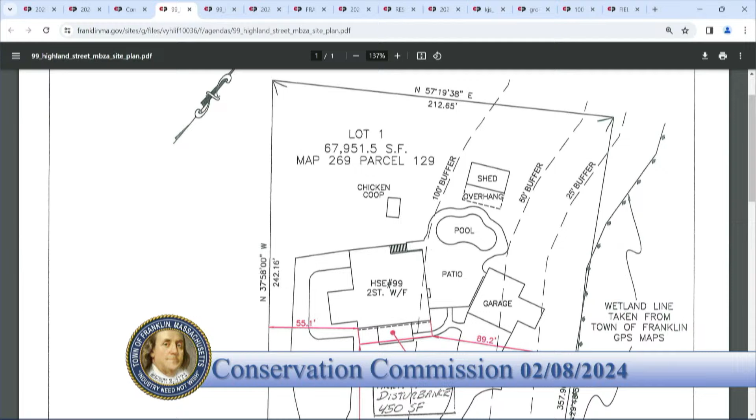Good evening, my name is Bill Yadacernia. I'm an engineer, and the applicant's son, Darren Lang, is here. The applicant is Michael Lang at 99 Highland Street, and it's proposed as a minor buffer zone activity. It's construction of approximately a 10-foot wide by 44-foot long awning over the front of the house.

The awning is made out of wood with an asphalt roof, and the base would be patio blocks on the ground underneath it. For the foundation, I think in your documents we recommended a 4-foot deep sonotube, which is concrete and has to be excavated. We've also been looking into an auger instead. These augers cause much less ground disturbance — you screw them into the ground, so you don't have to worry about excavation and all that soil being disrupted.

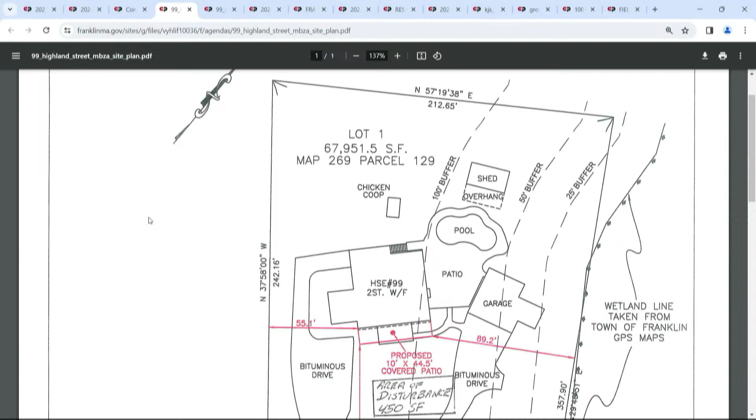The minor buffer zone activity is about 89 feet from the edge of the bordering vegetated wetlands. The ground disturbance is about 450 square feet, of which about 90 square feet is actually in the buffer zone — the rest is outside the buffer zone, as you can see on the sketch. I think that's pretty much it. We believe everything complies with the criteria of the minor buffer zone activity. It's outside the 25 feet, and it's less than the required amount of disturbance, so I believe that it complies.

And just confirming, it's already on a pre-disturbed area, basically on the lawn. There's an actual walkway there, so it's all previously disturbed area. You can see from the photographs that it's not on the entire front of the house, just on the main portion. That little addition on the left-hand side will not have the awning.

Great, and Bricolai, do you have any comments on the matter? All set there. Any comments or questions from the commission? It's pretty straightforward, yeah, I feel like we're pretty straightforward here.

All right, can I have a motion to go ahead and approve the MBZA for 99 Highland Street, please? I'll make a motion to approve the MBZA for 99 Highland Street with standard conditions. Second that.

And Jeffrey, how do you vote? Vote to approve. Vote to approve. Approve. And I vote to approve.

You guys are all set then. Thank you so very much. Appreciate you coming in.

That will bring us to our second MBZA, which is for 386 Coronation Drive. Do we have anyone here from 386 Coronation Drive?

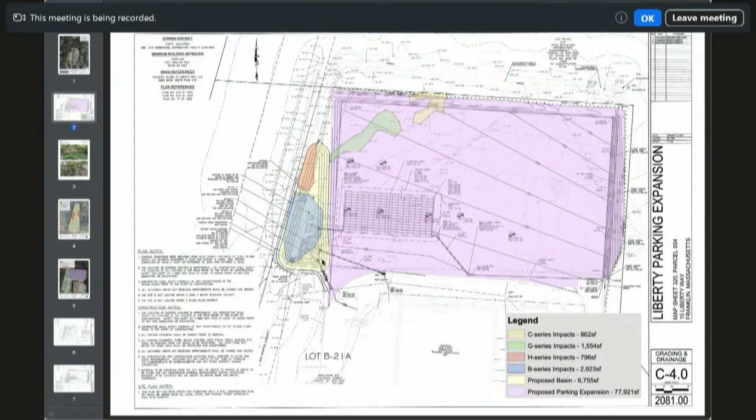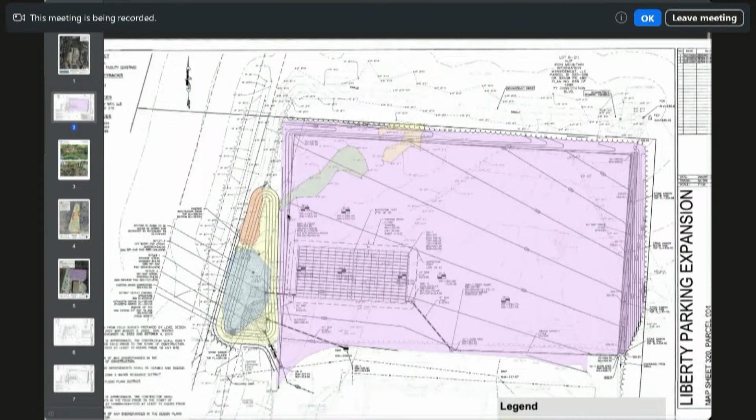This area here, the proposed basin, is about 6,700 square feet. So that is slightly more, if we were to call this wetland replication, than a 1-to-1 ratio of the entirety of these four impacted wetlands. Again, due to space constraints, there's really no good places on the site to actually replicate wetlands, so what we have right now as our design is this more or less 1-to-1 replacement of these stormwater IVWs.

And then we've also provided nearly an acre, or slightly over an acre actually, of invasive species management as additional mitigation. I know we had talked about this in the past. There's an easement along this side here that town DPW mows regularly, so that will be excluded from the planting area, but we'll still be managing the invasives in there.

There's a pretty good dominance of some invasive vines that run along the ground, as well as some stump-sprouted things like multiflora rose in there. So there's still benefits to managing invasives there, but that area is only going to be seeded. The entire remainder of that invasive species management area is going to be planted with native species to fill in the gaps left by the invasive species that were removed.

So that is essentially the summary of where we're at now. Again, understanding that no one's had time to look at this in depth, I'd be happy to take any questions, feedback, anything along those lines, but that's where our proposal stands at the moment.

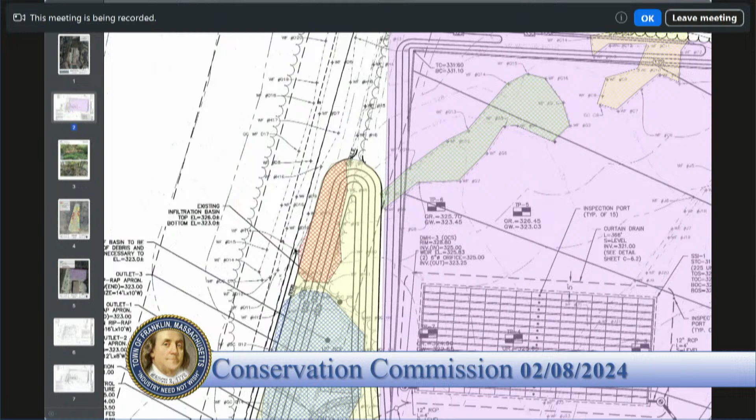Chris, on this drawing, where's the limit of the easement? The easement's a little tough to see, it's these dashed lines over here, and there's actually three easements that run along this area. They overlap a bit and they're not super pretty, but this proposed work essentially comes up right to the edge of that easement.

So for context for the commission, I was asking because DPW opposed any woody vegetation in their easement, and on this basin's banks, they're proposing woody vegetation.

And then just a clarifying comment for the commission, more precautionary, not against this project, just something that I foresee and something we've dealt with, is that Chris is right, they are constrained for their replication, but this will be a stormwater basin. And as we've seen on other projects, basins need to be maintained. They need to have O&M plans, or if they're not being maintained, then there's jurisdictional issues, which actually applies to this parcel, doesn't it, Chris? So that's just something I'd like the commission to consider, that while this definitely does have vegetation indicative of a wetland restoration or replication, it's still designed as a stormwater basin.

But other than that, I don't have any other comments. Thank you, Chris, that was helpful.

Absolutely. Bricolai, could you repeat the issue with the woody plants?

Because DPW maintains this sewer easement and mows it routinely, when we were looking at replication for the impacts to the northeast here, the easement was land to utilize for that. But because DPW maintains this easement and mows it, they do not want woody vegetation planted.

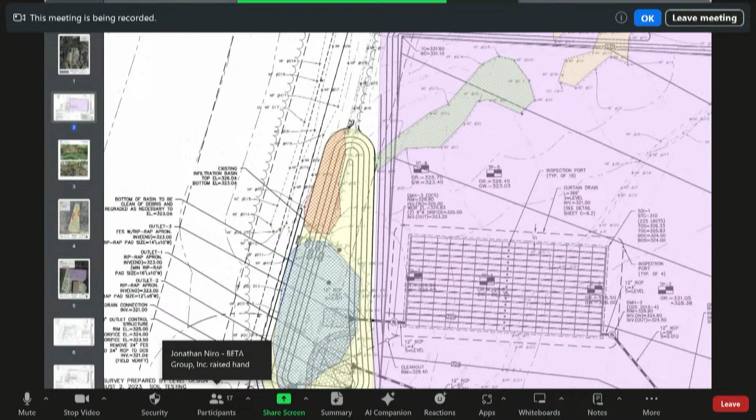That was actually my next question. Is there a variance already submitted for the inability to do the 2-to-1? Is that already in our files? We do have a variance, but I don't have a revised version, so I don't know what differs from this plan versus what was submitted. That was not part of our submittal yesterday, but we will get you a revised variance request encompassing this new proposal.

Bricolai actually brought up one point I wanted to ask about regarding future operation and maintenance of the basin, if it is intended to serve as both a stormwater basin and something to mitigate impacts to historic basins that have developed into wetlands. Chris, do you know if this was designed as an infiltration basin, or if it's intended to be a wet basin?

I don't know that specifically offhand. We dug through the commission's records and the registry of deeds records and really found no evidence of any initial permitting or plans for these stormwater features. I'm sorry, I meant the proposed basin, if it was going to be infiltration or constructed. Yeah, I believe the intention was to provide additional infiltration.

The engineers submitted a response letter to planning board earlier this week, and that information should be in there. It's a little outside my area of expertise, but I believe the intent was to be an infiltration basin. We can take a look at that specifically and determine the best path forward for operation and maintenance of the basin, considering the future function as well as maintaining this native vegetation being planted.

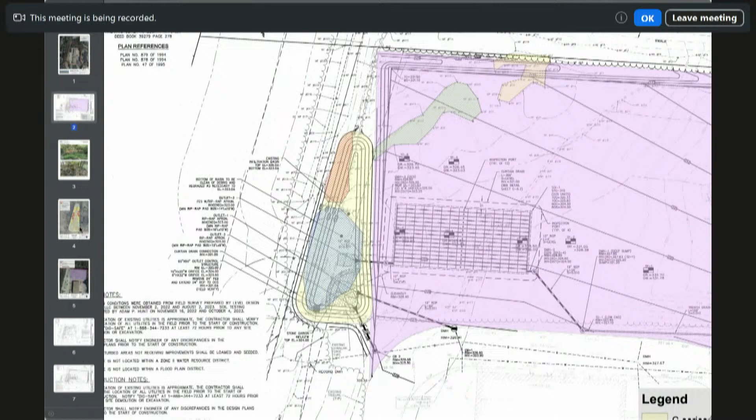Absolutely, and that is part of our idea here, that this will allow this part of the stormwater management feature to be maintained. That's why we left some openings in the plantings to allow for better access, to be able to clean out sediments and debris and that sort of thing.

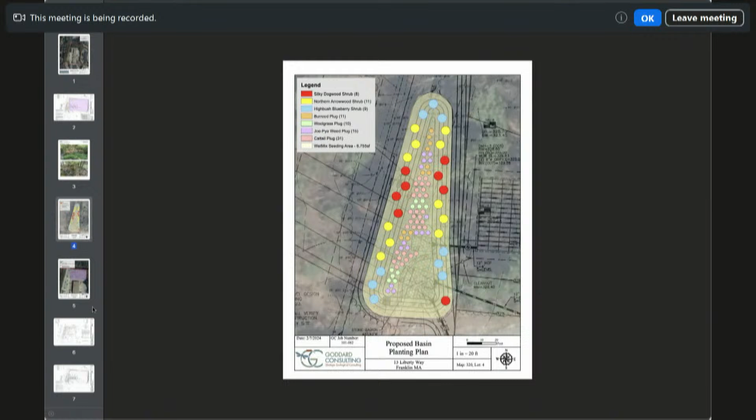I actually have a follow-up question about invasive species management. Can you remind me how long you're proposing monitoring, considering this is part of the variance request and restoration, and if the property owner understands what they need to do in the coming years to ensure the invasive species are maintained? Absolutely, I believe the invasive species management plan calls for 3 years of monitoring. We can discuss if the commission would like to see more than that. Yes, I do believe the property owner is well aware of these concerns.

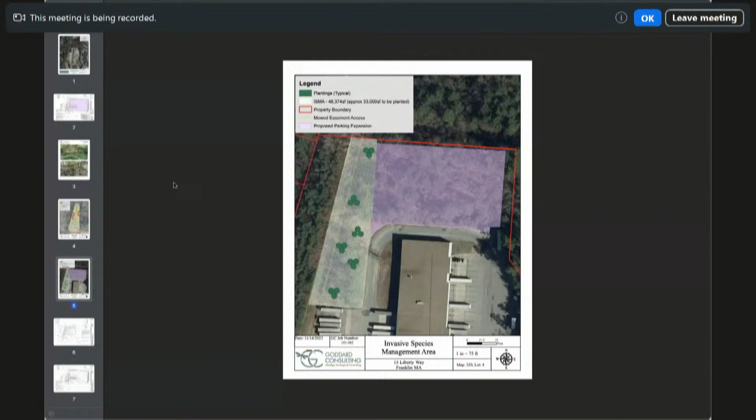Thank you, Chris, that's all for me, Chair Hagan. Thank you, John. Was there anything else from your perspective, any questions you had? No, nothing further, thank you. Thank you, and any comments or questions?

Yep, Roger? Yeah, who monitors the maintenance of the plants in that basin? In other words, let's say 5 years from now they decide to stop doing it. Does anybody pick up on that, or does it just turn into what it sounds like it is now?

So this basin will be covered under the O&M plan for the project as a whole, which will require regular inspections and maintenance, and I believe that travels with the deed of the property, if I'm not mistaken. As far as the vegetation piece, that will be included within the invasive species management plan to ensure invasive species aren't popping back up in that natively planted area. So it's a double-pronged approach - maintenance of the stormwater feature under the O&M plan, and maintenance in terms of managing invasive species under the invasive species management plan.

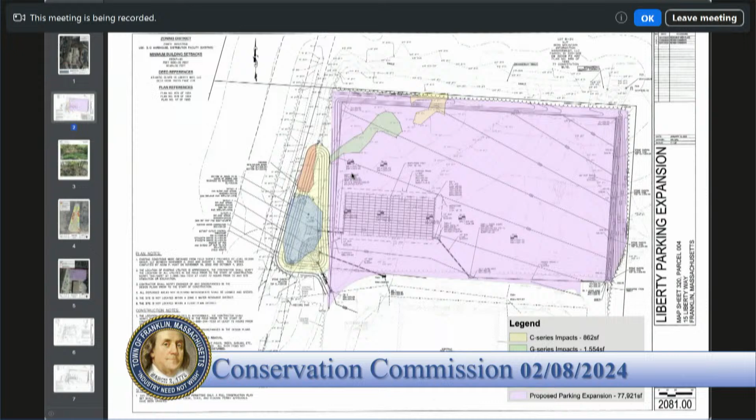Jeff, how do you vote? Continue. Vote to continue. Continue.

So the NOI for 15 Liberty Way is continued to February 22nd at 7:01 PM.

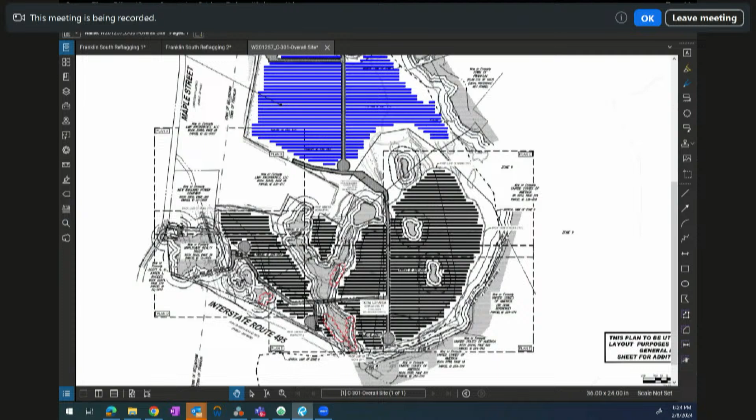Just a quick reminder, this was the overall plan from our set, and the area in blue was that northern portion of the Maplegate Country Club that was previously approved under a separate application. The project we're talking about now is the whole southern piece, shown in black and white. What I did on this plan is I quickly highlighted in red.

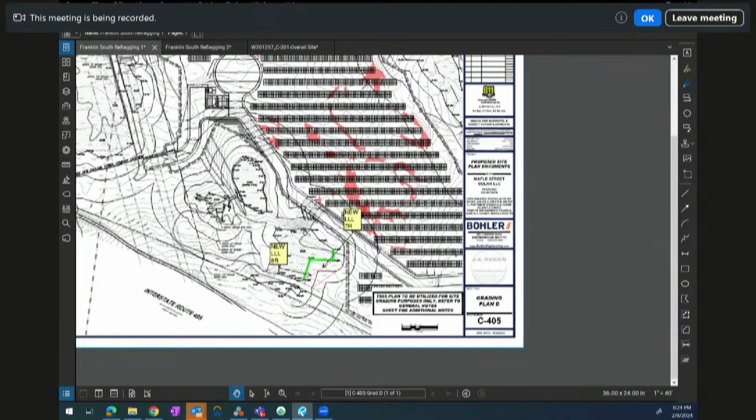There are 4 areas that were in question, brought up in Jonathan's letter from Beta. Our environmental consultant, LEC, went back out on the site, walked it a couple weeks ago, and reset flags, ending up setting 19 additional flags out there. These are the 4 locations, and I have 2 blow-up versions to show what it's going to look like.

Next to one of the larger vernal pools and vegetated wetland, we had a line that previously one of the flags was pointing further in. We set 2 new flags out there, which will extend the wetland line a little bit further back into the area of improvement, and also adjust our buffer lines.

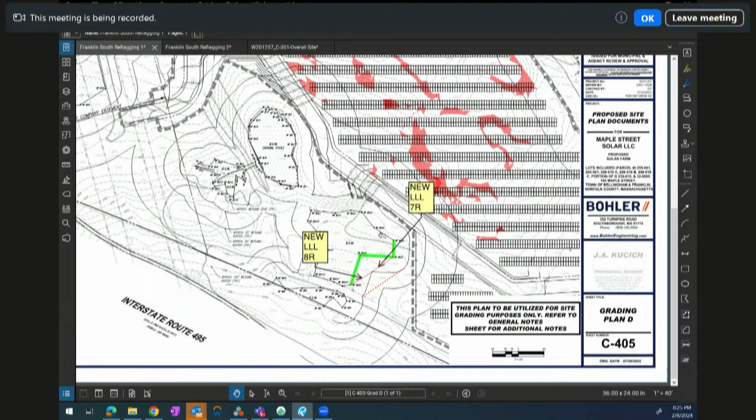This thick gray line delineates our limit of improvements and our fence line. So even with the adjustment of this wetland and the wetland buffers, I don't think—besides maybe our final calculations of disturbance within the buffer line changing slightly—we're still going to maintain outside the 25-foot no-touch, and it won't be impacting that wetland. That's one area I wanted to identify.

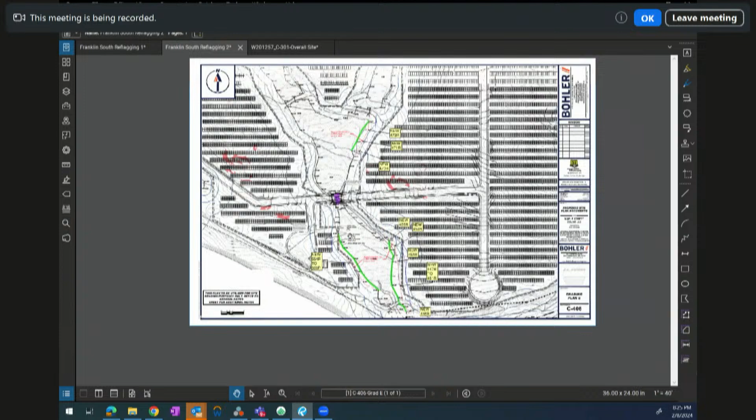On the other plan, there's more impact, like the larger Y-shaped wetland as it channelizes underneath the existing golf cart crossing and turns into that stream we talked about. On either side, green shows the highlighted area where we were calling out the wetland line previously. The dashed red line aligns with where we've now set the new flags, pushing in almost 20 to 25 feet on both sides, getting wider.

The blue represents approximately where a 25-foot buffer is going to be, so you can see why it's going to impact the plans a bit. We're going to adjust our fence line, adjust our limit of work line, shift some solar panels around, maybe even lose some solar panels to make sure we maintain outside that buffer impact. That's what we're working on now.

I think generally, because of the size and overall area of the project, we'll be able to either shift some panels or make it work. But we will be looking to remedy this with the updated set of plans.

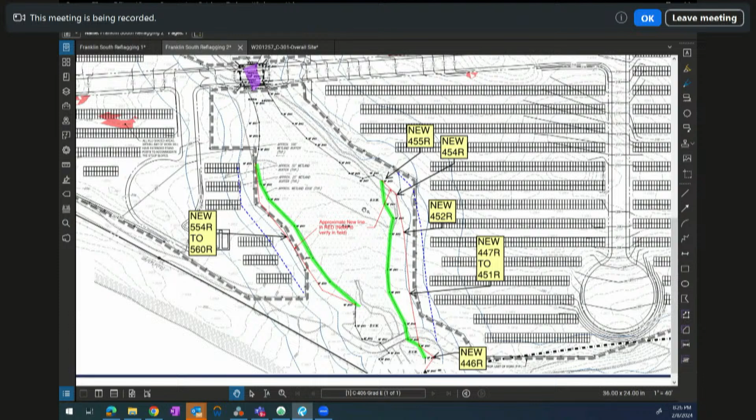The fourth area that had some wetland adjustment is actually the area where we were previously calling out additional wetland compensation. Again, the green represents the old line, red represents approximately where the new line is going to be, and the blue is the buffer. So maybe the fence line and limit of work changes a little bit, but not as much of a solar impact here.

It will change how we delineate our wetland restoration work in this area. We'll still be providing it, and we have plenty of room to provide additional wetland mitigation, but we've got to adjust it. So that's kind of what we're working on.

Our plan is obviously to keep moving on this project. We're eager to keep going, but we've got to get the correct drawings in, and we just got the survey back today, so it takes a little bit of time. We had a couple of those snowstorms in between, which didn't help when it comes to flag delineation and survey work. So just timing all that is kind of why we got to where we are now.

But again, we'll get everything in, get everything back to Jonathan and the team, and look to further this conversation at our next meeting.

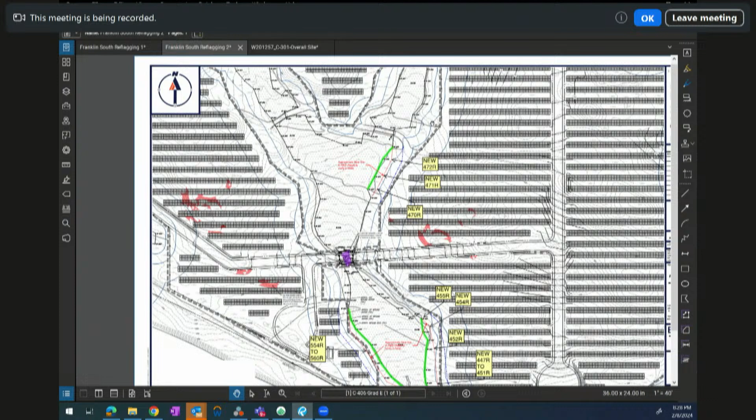Just one comment, and that is only that Bohler has been quite communicative. So wonderful, I think they do not fall within the 30-day time limit. So Greg, I think you're okay. Thanks, Bricolai.

Awesome, and John, I know you're on. I don't know if you had any questions. I know you'll have to review everything when it's submitted, but any questions or comments from your end? Just the comment that I appreciate LEC going back out for the applicant. Just looking at what was roughly sketched out, pretty much matches up with what I observed in the field, based on my knowledge of the site and looking at the plan.

Thanks, John. Any comments or questions from the commission at this time? All good. Any comments or questions from the public regarding parcel 3 of 160 Maple Street? All right, well, with that, I will take a motion to continue the NOI for the proposed solar array at parcel 3, 160 Maple Street.

I'll give a motion to continue the NOI for the proposed solar array, parcel number 3 at 160 Maple Street. Second that? That'll be to February 22nd at 7:03 p.m., I'm sorry. No, that's okay, thank you.

Jeff, how do you vote? Vote to continue. Continue. I might also vote to continue. Thanks, Greg, we will see you in a couple weeks. Appreciate the update.

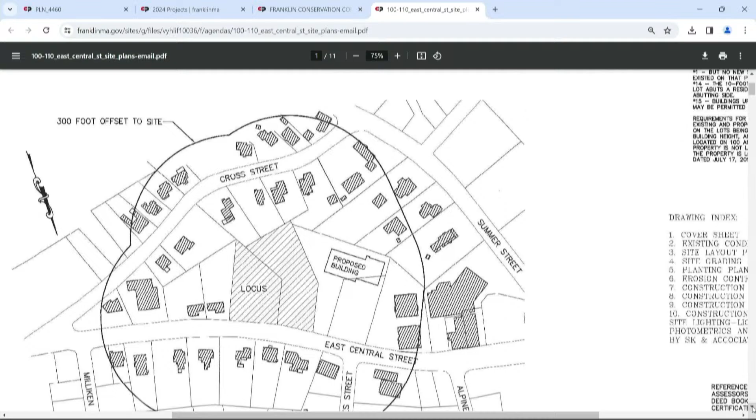This might help a little bit. Yes please, I'm ready. I'm here, this is the... can you see? Here. And that, this is a two-house building, right? A condominium. And here, I cannot paint.

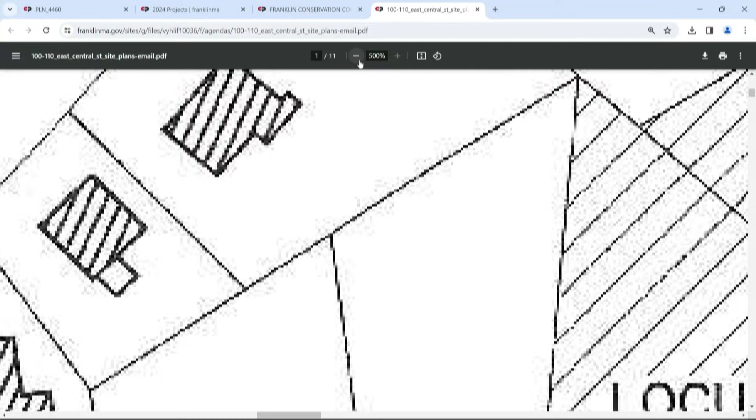The wetland, all the lagoon, is over here. Do you have a pointer or something I can use? Let me see. If you look at the locus map here, the building on the left is 138, where we have all the glass and we're going through a commercial build now. The two to the right of that, you kind of see a mirror image of the houses - those are the two duplexes, one's white that we remodeled, and the other one's another color.

So this is in the backyard - we share that wetland in the back. Got you, so those pictures are basically the backyard facing 140. It's hard to tell, I mean, unless I look at the grading, but these properties are up the hill I guess. Exactly, yes, so the water goes down, right? Correct. I guess a big part of what we have to deal with is post-construction and pre-construction drainage.

I'm not an expert on any of this, but Rick can talk a little bit. So whenever we have to do a project, it'll be better - we don't make it worse, in layman's terms, as far as stormwater goes. We have recharge systems, we have sheet flows, how they go. So this would improve that area with less stuff going down, more going into recharge. So there's mitigation to these projects - it doesn't make it worse.

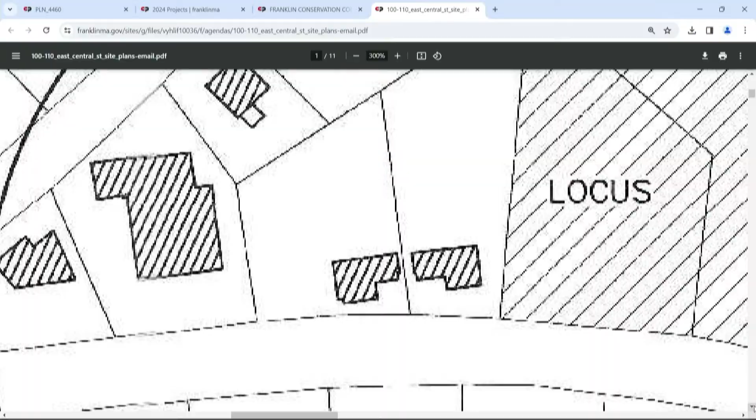Well, that's why I'm here - worried to see that it won't make it worse, and to make sure you as a committee can verify what they are doing, because I have no clue what really makes things different.

Before you go, give me your contact - you can come to my office and Rick and I can walk it and show you. It's easier that way, to see the map and see the wetland, because that's why I wanted to come here - is it not a wetland? It's a question of how deep it has to be, because there was a lot of water, so it's not the same. I don't know if you see it differently when you see the space versus when you see the water there.

Thank you so much. No, but seriously, just write down your name and I'll call you tomorrow too - that way it'll be easier, I can walk through with you if you don't mind. Thank you, Sansola - I was gonna say, you've waited all night too. I know, I understand, and good comments. Brad, thanks for working with me. Yeah, I know it goes fast. My phone number? Yeah, that'd be great.

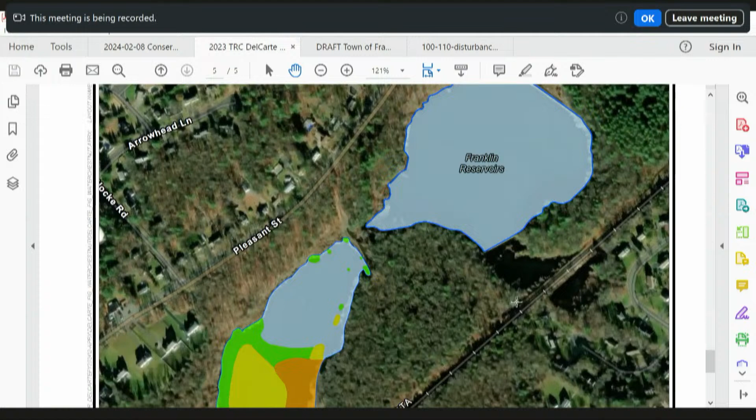So this is pre-treatment, July 3rd, 2023. Blue is not present, open water, green is sparse, specific to water chestnut, sorry for the new commissioners. Back in 2015 to 2016, the commission hired a third party, Solitude Lake Management, to begin treatment at DelCarte for invasive species, water chestnut and milfoil. Milfoil has been successfully eradicated, so now we only treat for water chestnut. Blue is open water, green is sparse, yellow is patchy, and orange is dense. So you can see on July 3rd, there's mostly sparse vegetation coverage with a predominance of not present.

So going to treatment of August 29th, 2023, you can see this northeasterly pond is clear, but you do see some more patchy and dense polygons here in the southern portion of the ponds, in the south pond. So just quickly rolling up, I wanted to note that we had a decrease of 13.6 acres total, from 21.3 acres to 7.7 acres this season. However, they did note that areas of patchy and dense water chestnut growth persisted in the southern pond.

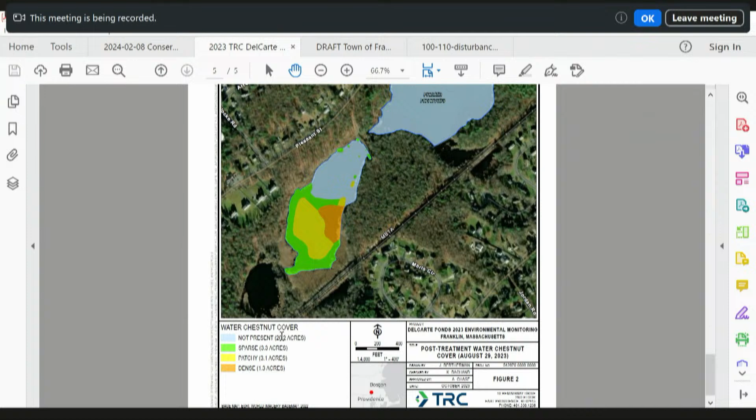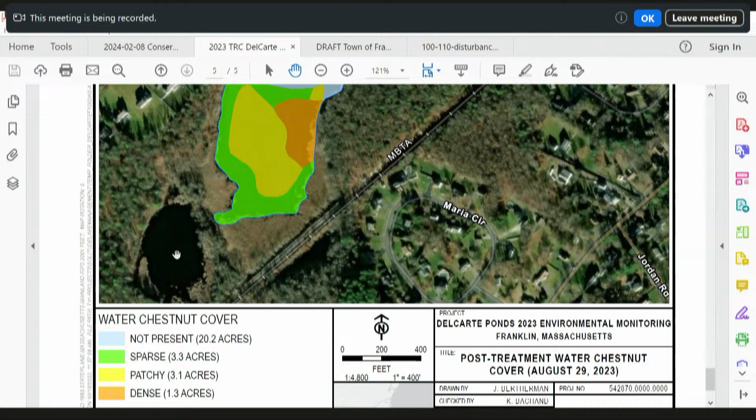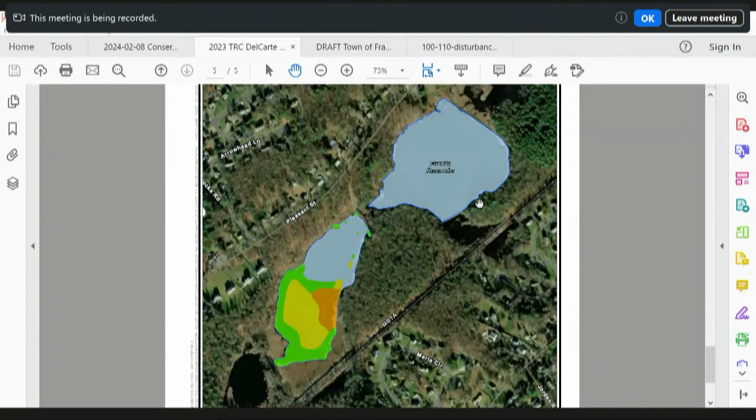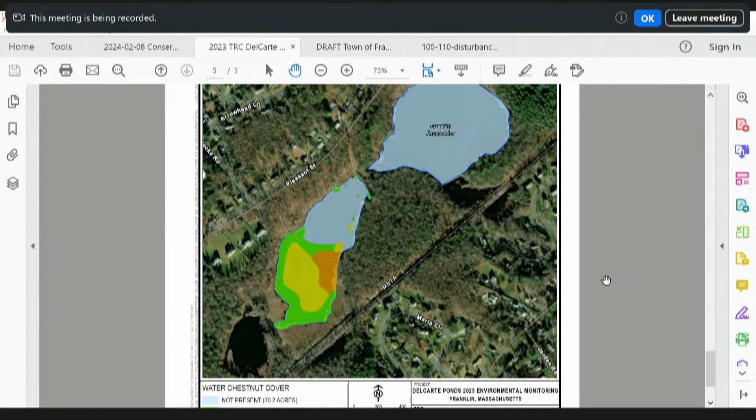So this is your year-end report. Other than that, everything was stable - dissolved oxygen, fish surveys, things were all well and good.

With that, I don't want to lead too much into discussion because I only just received this and have to go back and figure out how we handle this with open meeting law, but I did receive a new contract for fiscal year 2025. So I will just show you the contract because it is public information, something for all of you to ruminate on for next time.

Can I ask, just a what-question about the last contract? I'm just wondering, are we paying for specific treatments or are we paying for results?

You are paying for specific treatments with a year-end report. So, I think I'm sharing my screen now - this is what you pay for.

I haven't dug too deep into this draft contract. I did hear from the project manager that there are some new treatment ideas out there that would be cheaper. Whether or not that treatment is reflected in this cost, or if this is the treatment we've had before, I'm not sure. It's almost been a decade since the commission has been treating - I always err on the side of caution. I have no problem seeing what the current rate is or what other genius ideas are out there, but again, something for you to ruminate on. I would not concern yourself with this price for the next 60 days, because if, for example, the commission were to want to seek other services, if any price is over the $10,000 limit, it has to go out to bid. And I can tell you right now, that's probably going to be over 60 days.